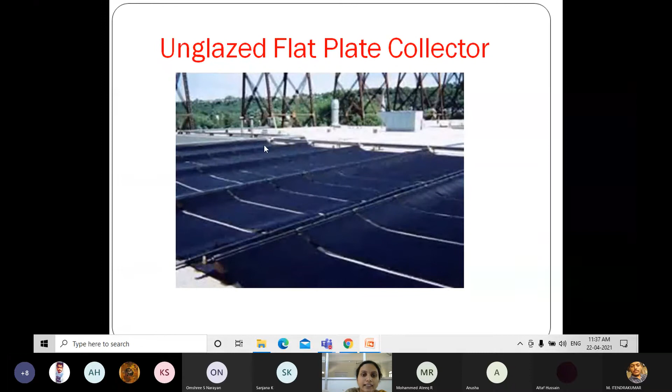Some more points about this: a large portion of the sun's energy is absorbed here because glazing is not there. It is unglazed, so it will absorb more heat. But it is not insulated, so the heat it absorbs will last only for a few hours, and then the absorbed heat is lost. That's why they say the losses are also more. Next, this is the figure of unglazed flat plate collector.

Unglazed perforated flat plate collector. It is mainly used for heating of buildings, and here industrial grade siding or cladding has perforated small holes at a pitch of 2 to 5 centimeters. Small holes are there on unglazed perforated plate collectors.

It is mainly used for heating of buildings, building ventilation, air heating, and crop drying. And in some countries they have installed this for drying of tea, coffee, tobacco and beans. These are the applications or uses.

Air is passed through the collector before it is drawn into the building to provide preheated fresh ventilation air. What happens here is, before passing through the collector, it will draw into the building to provide what? To provide preheated fresh ventilation air. Air is passed through the collector before it is drawn into the building to provide preheated fresh ventilation air. And this system is an efficient and cost-effective solution.

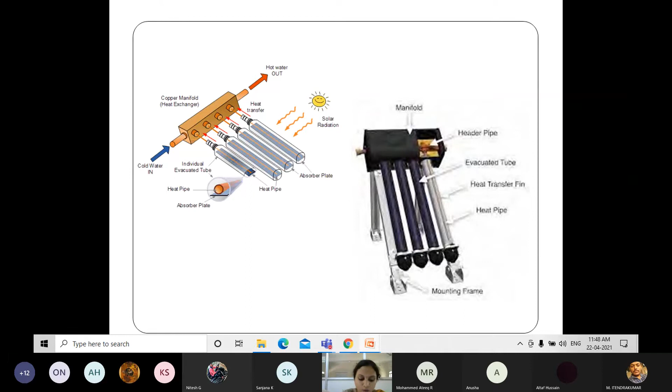Okay, what do you mean by conductive? It means it will allow the heat. And what do you mean by convective? It means it will transport warm water to the upside and cool water to the downside. Okay, that is convective. These are the types of collectors, or we can say the configuration of collectors.

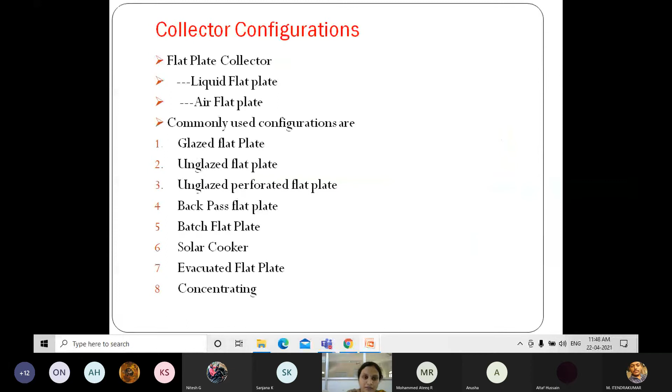Okay, first is glazed flat plate collectors. Flat plate collectors may be liquid or air based. It is mainly used for temperatures of 30 to 70 degrees Celsius in glazed flat plate. Liquid is used for domestic and commercial building water heating and indoor swimming pools, and air based collectors are used especially for ventilation air and crop drying.

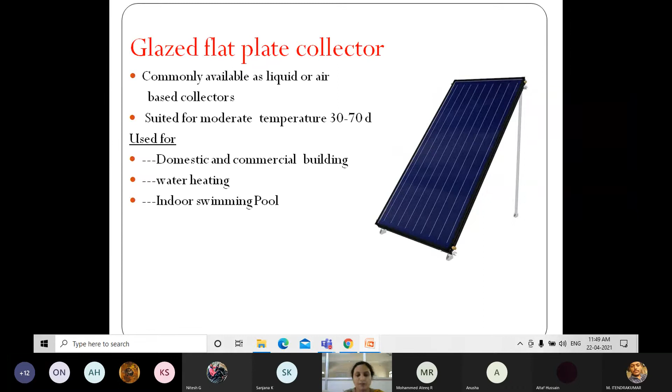Okay, what about unglazed? When you see the unglazed flat plate solar collector heading, you need to remember there are more losses, because there is no insulation here. It will absorb heat directly because there is no glazing on it, so it will absorb more heat. But losses will be more because there is no insulation, and it is used for low temperature applications, such as heating outdoor pools, fish farming, and preheating water for car washes.

And this will transfer heat so well to air that it will even capture heat from air at night time also. Okay, the unglazed flat plate solar collector is different. The unglazed perforated flat plate collector is different. It is industrial grade siding or cladding having small perforated holes on it, at a pitch of 2 to 5 centimeters.

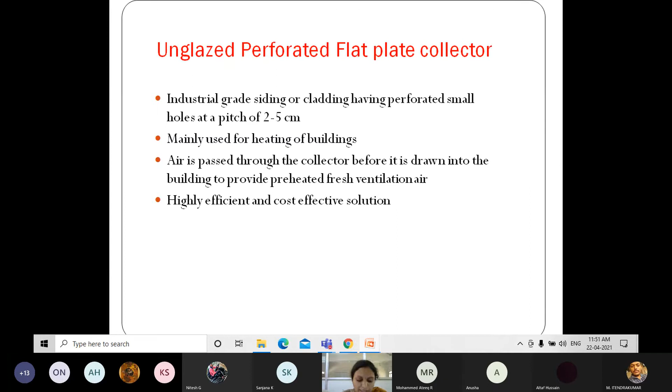It is mainly used for heating of buildings, and as I have said, many countries are using this system for drying crops, especially tobacco, coffee, tea and beans. This is used in South America and Asia for drying tea, tobacco, beans, like that. And this is used for building ventilation air heating.

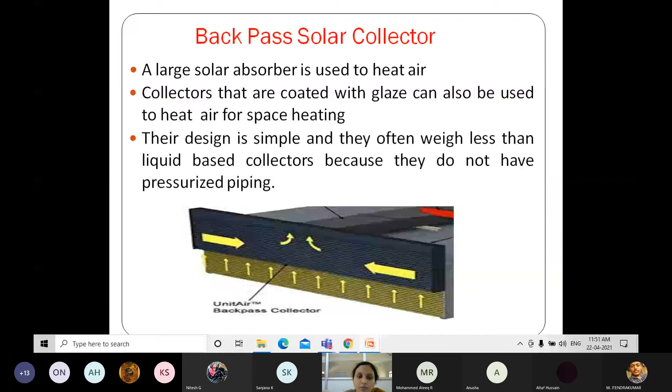Backpass solar collector. This backpass solar collector is mainly used to heat air. These collectors are covered with what? They are coated with glaze. It can be used to heat air for space heating. The design is simple, and its weight is less than liquid based collectors, because here we are using air based collectors. So compared with liquid, the weight will be less, and they do not have pressurized piping here.

Next, flat plate collectors with flat reflectors. Reflectors, that word you need to remember. If you use a reflector, it will absorb more solar energy. Okay, because if we use a reflector, it will absorb more solar radiation. It will lead to an increase in the overall performance of the collector.

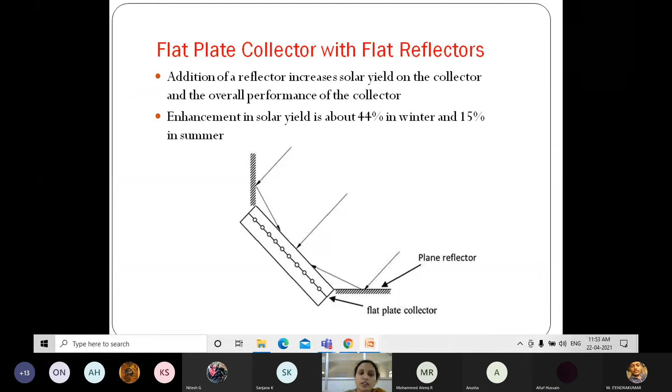Here they are saying enhancement in solar yield. That means if you use a reflector, solar energy production will increase by 44% in winter and 15% in summer. Okay, this is the flat plate collector with flat reflectors.

Next, evacuated tube collectors, that I have already said. This is less efficient during cloudy and cold weather conditions. It is not used much in cloudy or cold weather conditions. Weather influences means the weather will affect it. Due to the weather conditions, condensation and moisture will lead to system failure. That will damage internal materials and lead to system failure.

Okay, next, a fin is used. Why is a fin used here? The fin is used to prevent radiation heat losses, and also it will absorb heat easily. The fin is covered with a coating. It will absorb heat well, and it will prevent radiation heat losses.

Next, evacuated tube collectors operate in a different manner. They can achieve high temperature, that is, they are used for high temperatures of 75 to 180 degrees Celsius. They are suitable for industrial and commercial applications, highly efficient with low thermal losses.

And as I have said about evacuated tube collectors, air is removed between two glass tubes. Air is removed or evacuated from the space between the two glass tubes to form a vacuum, which leads to the elimination of convection and conduction losses.

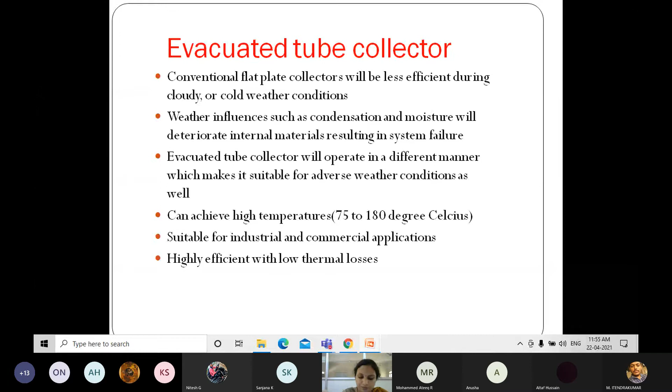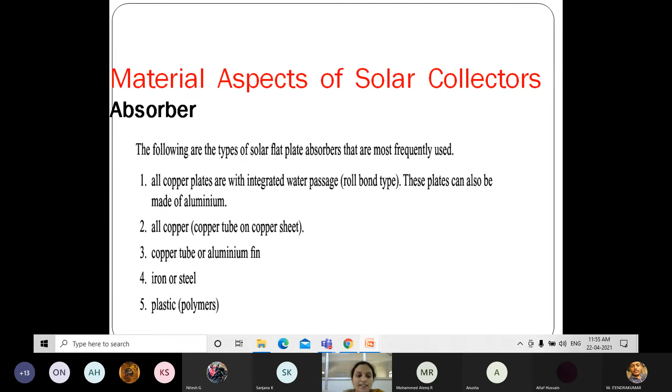We shall now know about the material aspects of solar collectors. The first one is the absorber. These are the types of solar flat plate absorbers most frequently used. First is copper plates with an integrated water passage. These plates can also be made of aluminium, copper tube on copper sheet, copper tube with aluminium fin, iron or steel, plastic or polymers.

Absorptive coatings. A variety of absorptive coatings are being used, ranging from flat black paint to baked enamel. Flat black absorber coatings have high absorptivity. Why we need this: it should capture the heat from solar radiation, and capture it fast.

The specification requirements of an absorber coating for flat plate collectors are like this. It must not degrade under ultraviolet exposure. It should not degrade under what? Ultraviolet exposure. It must withstand temperatures up to 200 degrees Celsius. These are the specification requirements of an absorber coating.

It must withstand temperatures up to 200 degrees Celsius, and it must withstand many temperature cycles over plus or minus 40 degrees Celsius, and many cycles of low to high relative humidity. Climate changes will happen, so it must withstand these, and it must not chalk, fade or chip.

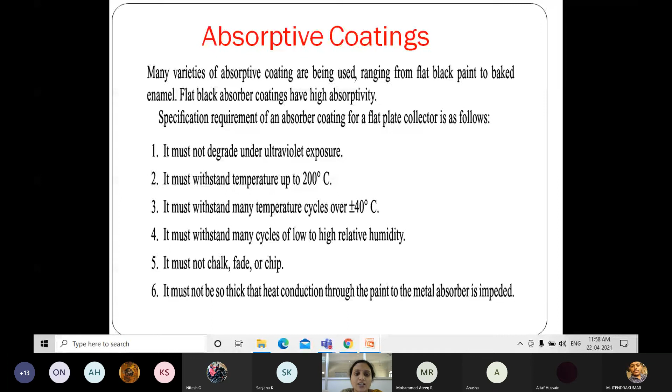Next is glazing. One or more sheets of glass or other radiation transmitting material is used as a transparent cover. For what? For a solar heater or solar water heater, or solar energy production. It must reduce convective losses from the absorber plate. These are the important functions of glazing.

It must reduce convective losses from the absorber plate. Convective losses means heat losses. The meaning of convective is that hot water goes upside and the cold water comes down, that is, it transports warmer parts upside and cooler parts down. Here the heat losses should reduce. It must reduce the heat losses or convective losses from the absorber plate.

It must suppress radiative heat losses from the absorber plate, and it must protect the absorber from the elements and from excessive ultraviolet exposure. This material must be resistant to ultraviolet radiation. So it should reduce the convective losses, suppress the radiative heat losses, and withstand ultraviolet exposure. It should not be affected by that.

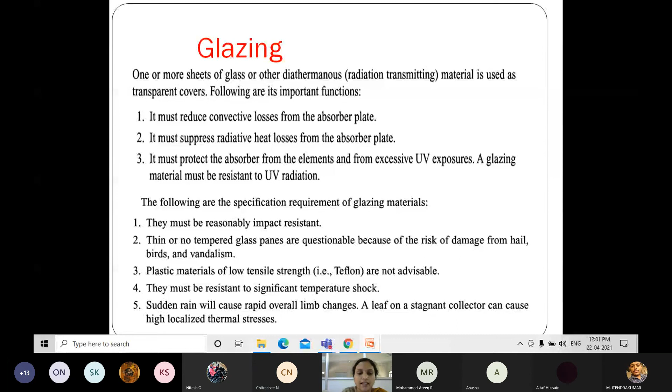Next, glazing for practical applications requires attention in the following areas: cost, longevity, absorptivity, and ability to withstand wind conditions. Glazing materials are glass and fiberglass, and Tedlar bonded to fiberglass. First, cost: glazing is high cost. Longevity means ultraviolet resistivity, thermal stability, and corrosion resistance.

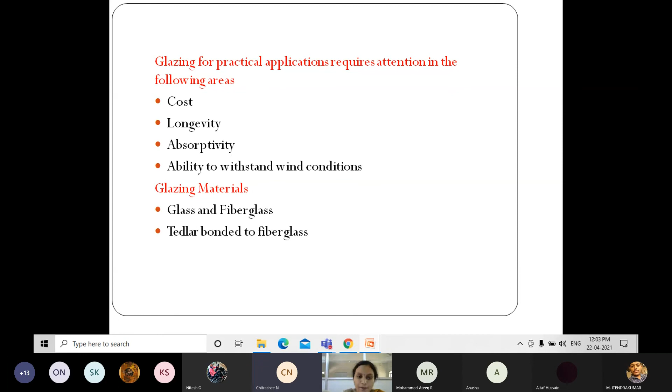Insulating shell. Solar flat plate collectors must be insulated against excessive heat losses on the backside and on the edges. Backside means 3.5 inch of fiberglass insulation or 2 inch of foam insulation. Side means 1 inch of fiberglass or 0.5 to 0.75 inch of foam insulation.

The next specification to be met by insulating materials is that it should withstand the maximum collector temperature rating, 200 degrees Celsius, without damage. Foam materials shrink due to excessive heat. The maximum temperature must not cause evaporation or sublimation of substances in the insulating materials, such as the binder of the fiberglass. Special fiberglass materials are available that have quite satisfactory outgassing rates.

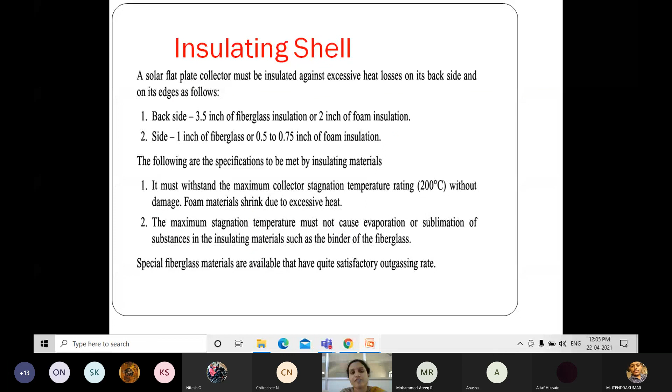These are the materials of solar collectors. In the next class, we shall discuss concentrating collectors and their different types. Okay.